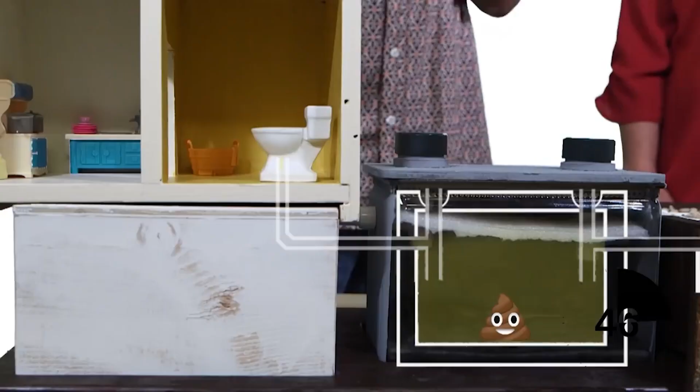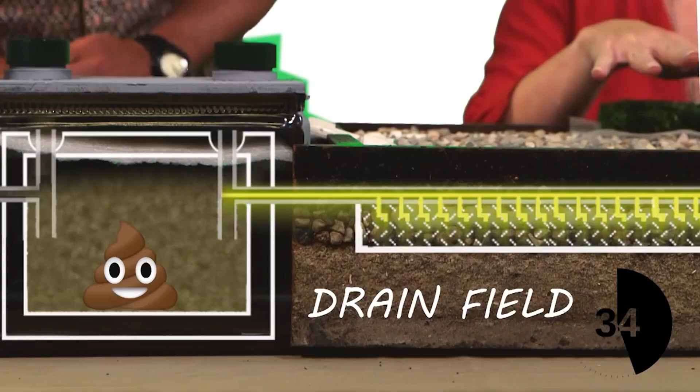After your poop takes a water slide ride into your septic tank, natural bacteria will help break down this stuff, but they can only eat so much. Everything the bacteria doesn't eat piles up in the tank over time. So remember to pump out your septic tank or the poop may try to bring the party back into your house. Ew! Meanwhile, liquid from the septic tank gets pushed out into something called a drain field. These pipes push wastewater through holes into a layer of gravel. This is where bacteria helps clean it before it filters through the soil and into our groundwater.

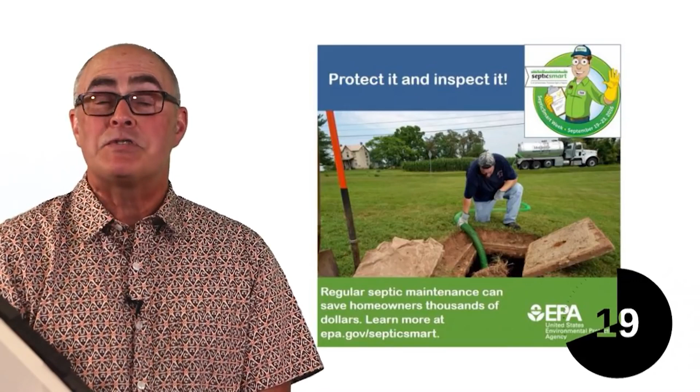But your septic system needs your help to do the best job possible. Start with these 3 SepticSmart tips. Number 1, protect it and inspect it. Have your septic tank pumped as necessary. Number 2, think at the sink. Don't use a garbage disposal. Number 3, don't overload your commode. Stop flushing things like wipes.

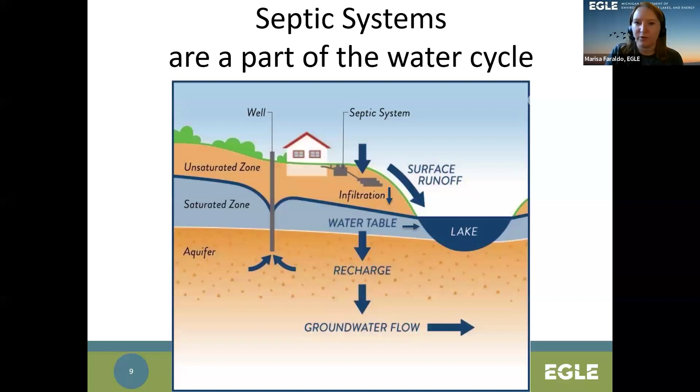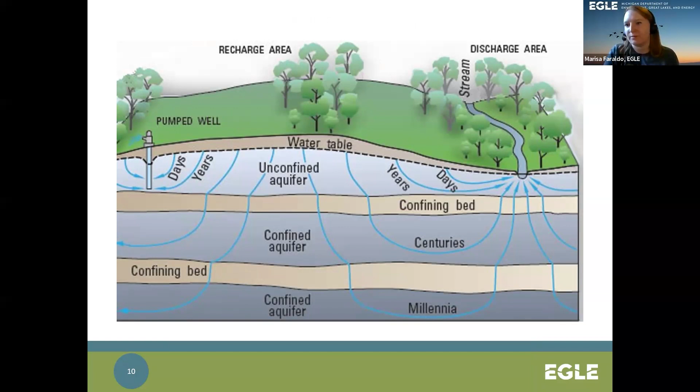This visual just shows the different timeframes for recharge into the aquifers, also known as the water table. Where there are confining layers such as clay, the deeper aquifers generally see longer periods of time before surface water reaches them. Groundwater is an important resource in Michigan.

There are estimated 1.2 million wells in Michigan. About 45% of Michiganders rely on wells for their drinking water, many of those being small and mid-sized communities utilizing wells, such as Lansing and Kalamazoo.

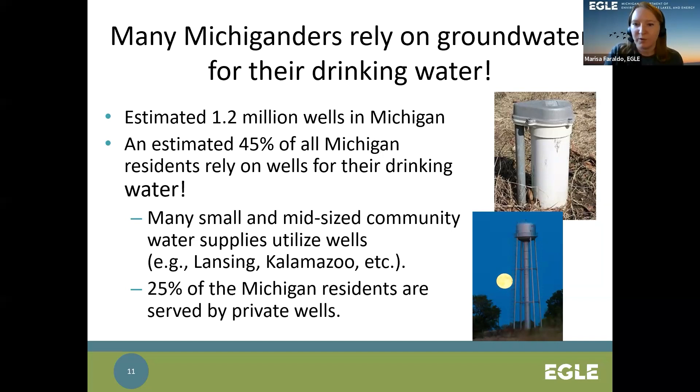25% of Michigan residents are served by private wells. Our surface water is also important. Michigan is home to 4 of the 5 Great Lakes, 6.5 million acres of wetland that support some of our rarest plants and animals, 11,000 inland lakes, over 76,000 miles of rivers, and 1,200 public and private beaches. In Michigan, we have many natural resources to protect.

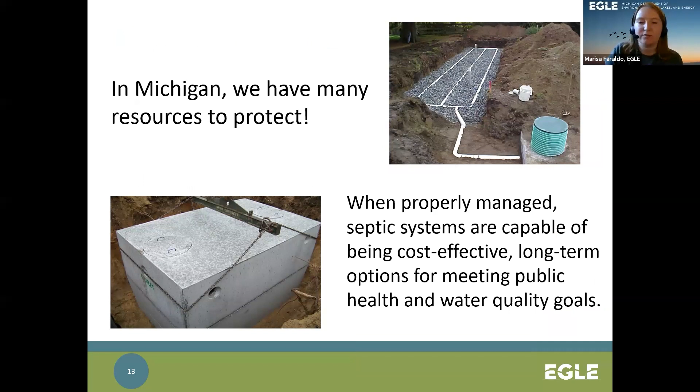When properly managed, septic systems are capable of being cost-effective, long-term options for meeting public health and water quality goals. So what is a septic system? A septic system is an underground wastewater treatment system. All wastewater treatment systems, whether it's a municipal system for a city or a single-family on-site system, include a collection system, treatment components, and dispersion into the environment.

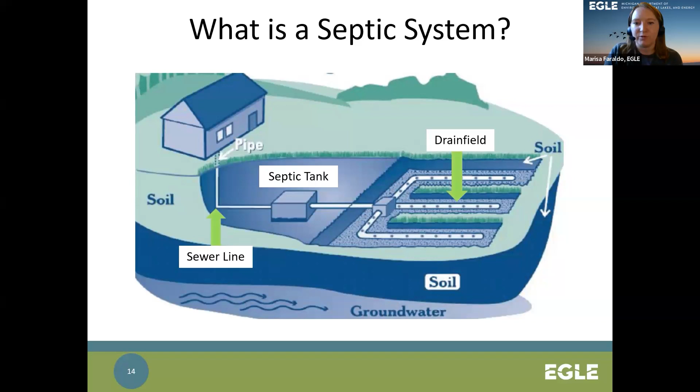In this image of a septic system, number 1 is the building sewer or collection system, leading to number 2, the septic tank, which is the first step in the treatment system, followed by the drain field, where the final treatment and dispersal into the environment happens.

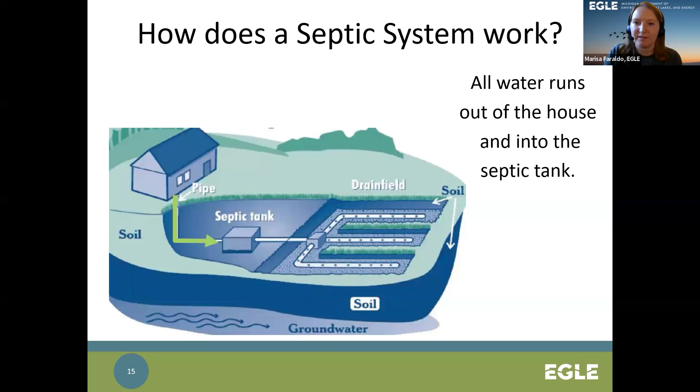How does the septic system work? First, almost all of the water runs out of the house into the septic tank. Almost all means that if you have a water supply treatment device, like a water softener, that discharge should not go into your septic tank.

What is a septic tank? A septic tank is a buried, watertight container, usually made of concrete, fiberglass, or polyethylene. A typical septic tank is 1,000 to 1,500 gallons for a single family of 4, and typically receives about 200 gallons a day. As the wastewater flows through, the solids settle and the grease and scum float, allowing relatively clear water to leave the septic tank.

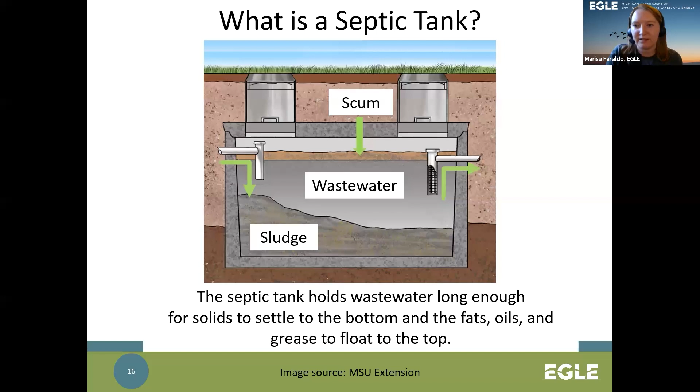Note that putting 200 gallons a day into a 1,000 gallon tank means that the water moves very slowly, taking up to 5 days to move through the tank.

A drain field is a shallow covered excavation made in unsaturated soil, also commonly called a soil absorption system. For conventional systems, research shows that once in the drain field, most of the treatment that takes place in the soil happens in the top 2 feet underneath the system.

While the treatment may be achieved in about 2 feet of soil in ideal conditions, if there is dispersal by gravity and therefore uneven spreading of the wastewater across the system, a deeper depth of unsaturated soil may be required for adequate treatment of the wastewater coming out of that septic tank. Requiring a minimum of 3 feet of separation provides a factor of safety, which may be needed at sites where drainage is limited. System designs can vary.

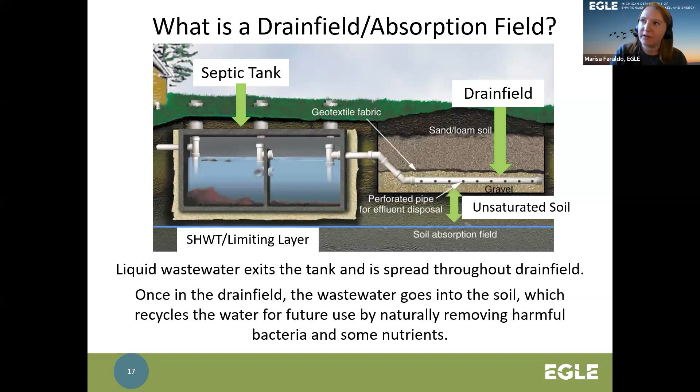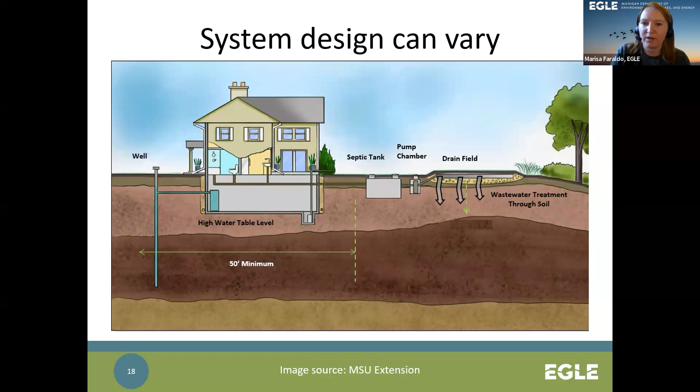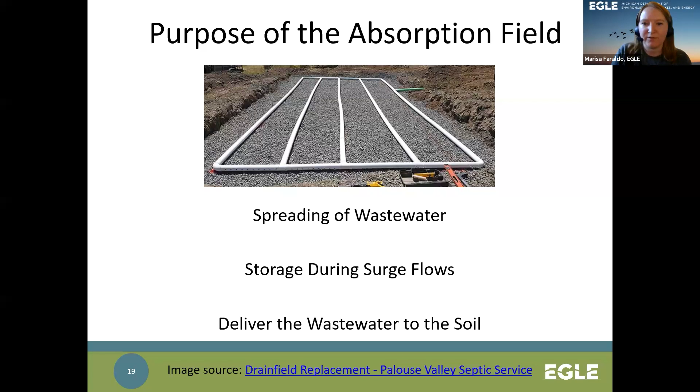We just showed what is also often called a conventional in-ground septic system, but in some locations with differing site conditions, it is common to need a raised system with a pump in order to overcome heavy soil and/or high water table conditions. The purpose of the absorption field is to provide spreading of the wastewater across the entire area, provide extra storage during surge or peak flow events, and to deliver wastewater to the soil, which is where most of the contaminants are removed prior to discharging to the groundwater.

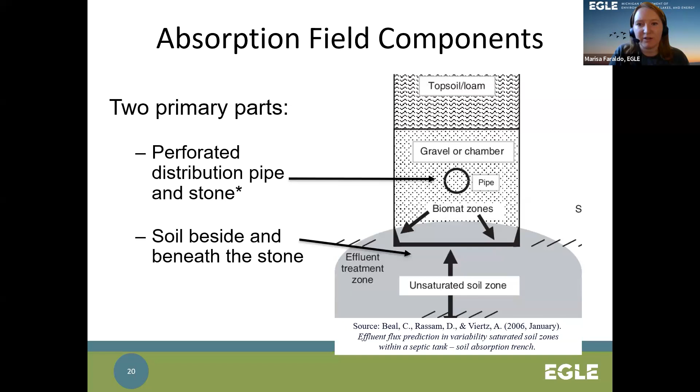In this diagram, we see a cross-section of a trench system, and as we mentioned, the absorption field is a network of perforated pipe and stone. Also, the placement above the highest seasonal groundwater is very important, as the naturally occurring bacteria that treat our wastewater do not live below the water table.

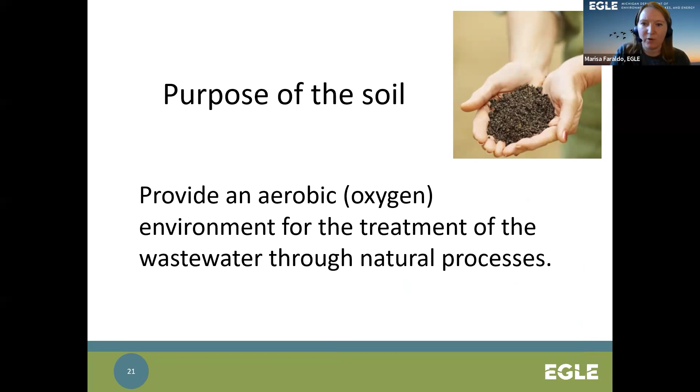Let's talk about the purpose of the soil beneath the absorption field. The soil provides treatment of the wastewater through biological, chemical, and physical processes, but only if the soil environment remains aerobic, meaning oxygen-rich and not saturated.

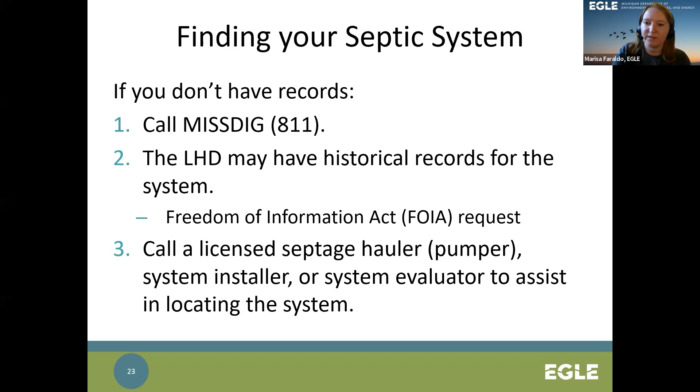Second, your local health department may have records for the system. There is the potential that if the home is older, there may not be records on file, or the records may be difficult to interpret. Another thing you could do is contact a licensed septage hauler, also known as a pumper, system installer, or system evaluator, to assist in locating your system. If you or other professionals cannot locate the system, it's better not to assume that the system even exists.

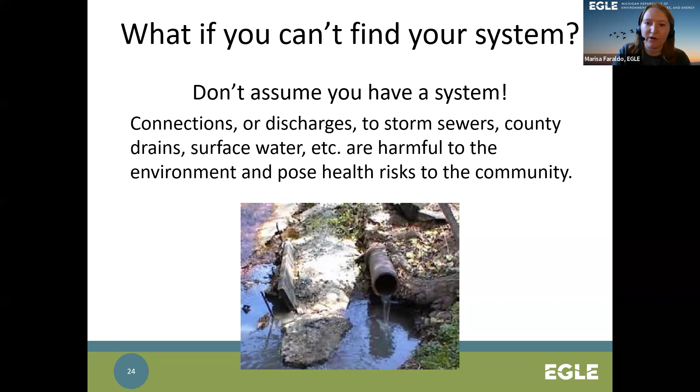It is possible that the home has a historical illicit connection. Connections or discharges to storm sewers, county drains, surface waters, etc., are harmful to the environment and pose health risks to the community.

Septic systems should not be out of sight, out of mind. Routine inspections and pumping as needed are important for maintaining the system and making sure that it's working. Catching a problem early on can save you costly repairs or replacement bills.

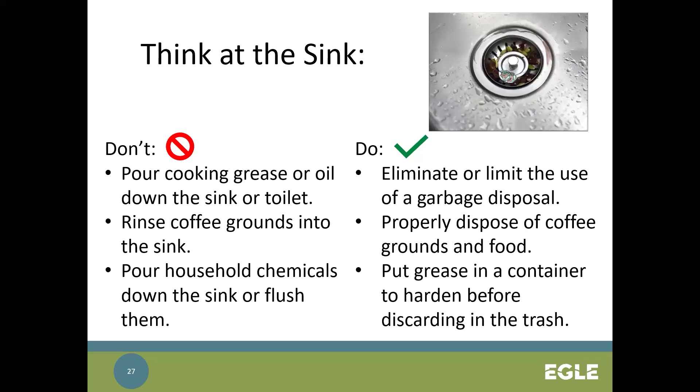You don't want to pour cooking grease or oil down your sinks or toilets, coffee grounds, food waste, using a garbage disposal, as we mentioned earlier in the presentation. These are all things that we want to avoid because they're adding extra solids into our system. They're adding, in some cases, medications or chemicals we also want to avoid. We don't want to add those things into our septic system. But what you do want to do is eliminate or limit the use of garbage disposals, properly dispose of your coffee grounds and foods in the trash, and consider putting your grease in a container to harden before you put it into the trash, rather than dumping it down that drain.

And then don't strain your drain. Again, being really mindful of our water use in our homes. Don't concentrate your water use by using your dishwasher, your shower, your washing machine, and your toilet all at once. All that extra water can really put a strain on your septic system. So what you want to make sure that you're doing is staggering your use of water generating appliances. This can be really helpful, especially if your system has not been pumped in a long time or during those really wet times of the year.

When we're having a lot of snow melt, we're getting a lot of rain, generally in the springtime here in Michigan, you want to be really mindful of how much water are we using at once, and you want to spread those things out. Rather than do 5 loads of laundry in a day, you want to kind of spread that out throughout the week. And then you can also consider becoming more water efficient by not only fixing plumbing leaks within your home, but installing water efficient products and appliances. Just a fun little tidbit, a leaking toilet valve, which doesn't sound like a big deal.

We've probably all encountered one at one point or another - a leaking toilet discharges about 2 gallons per minute and can result in just under 3,000 gallons of water in one day going into our septic system. Keep in mind, these systems are generally designed for a peak flow of 350 to 450 gallons a day. So getting an extra 3,000 gallons a day from just one leaking toilet is a huge deal and can have really harmful impacts on your system. So those kind of things that seem small actually have a big impact and should be addressed.

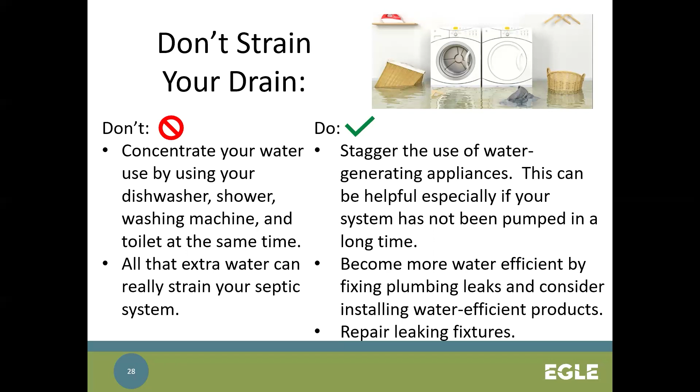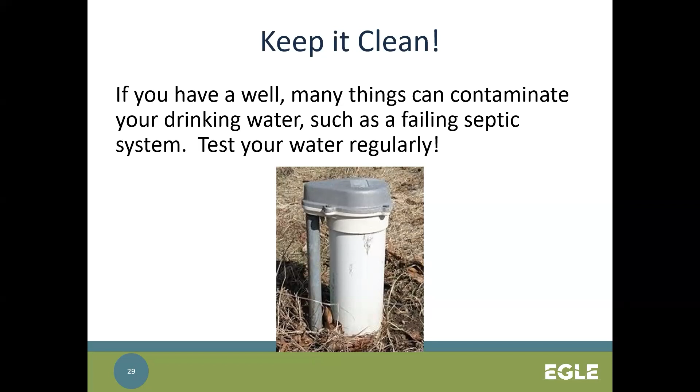Keep it clean. If you have a well, it's susceptible to environmental contamination from all sorts of sources, and a failing septic system is definitely one of those potential sources of contamination. It's really important to test your water regularly. If you live in an area where you're not sure what to test for, I recommend calling your local health department, asking them how you can get bottles and what specifically you should be looking to test for. That should be done on an annual basis.

Shield your field. I can't even count how many times I've gone out to a home and there are cars parked on the drain field, or someone wants to put a new above ground pool on their drain field, or a patio or a deck. All of these things are heavy and they can damage not only the pipes, but they can compact the soil in and around the drain field.

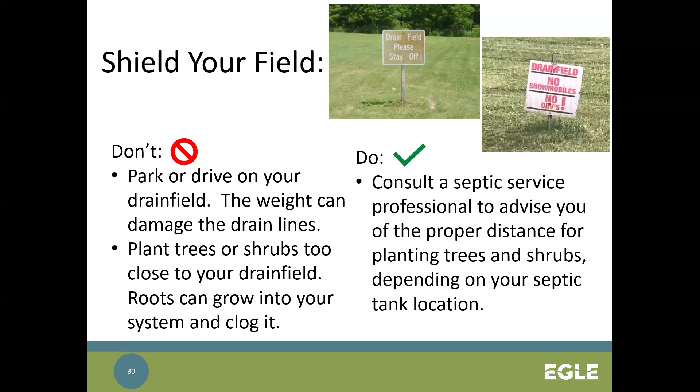So it's really important to keep that area free of any heavy equipment or heavy traffic. We also want to be careful of what sort of landscaping we're doing around our drain field. Planting trees or shrubs too close can lead to root intrusion and can cause serious damage in the long term. So before you're doing anything - having an addition put on, thinking about that pool, or maybe having a big party where you know you're going to need some extra parking space in your yard - it's really important to consult a septic service professional to advise you not only of the proper distance for your landscaping needs, but also on the location of your system. Knowing right where that is can help you to make sure that you're protecting it.

Don't overload the commode. So again, what are we putting down our drains? What are we flushing down the toilet? It's really important to not flush non-degradable products or chemicals such as hygiene products, condoms, dental floss, diapers, contacts, cigarette butts, cat litter, paper towels, pharmaceuticals, or - dun dun dun - flushable wipes. Flushable wipes, I know that they say they're flushable, but they do not readily or sufficiently break down in a septic tank, and we're seeing widespread problems all over the state, not only with septic systems, but with municipal systems as well related to flushable wipe use. So those things should all be going in the trash rather than down your toilet.

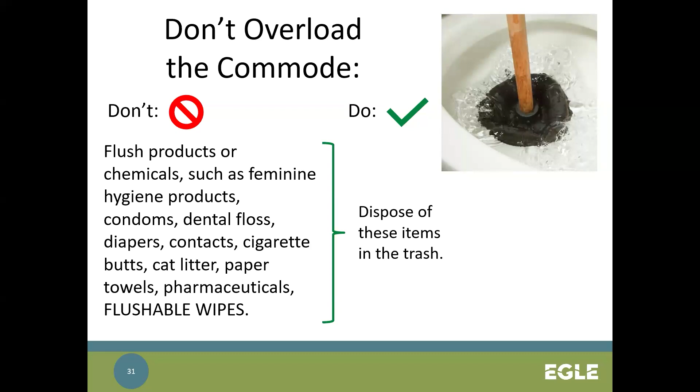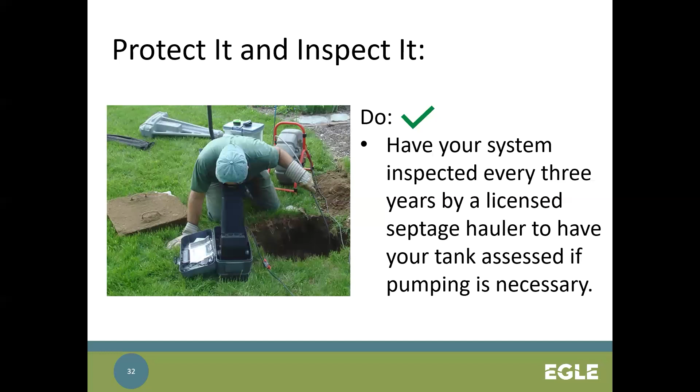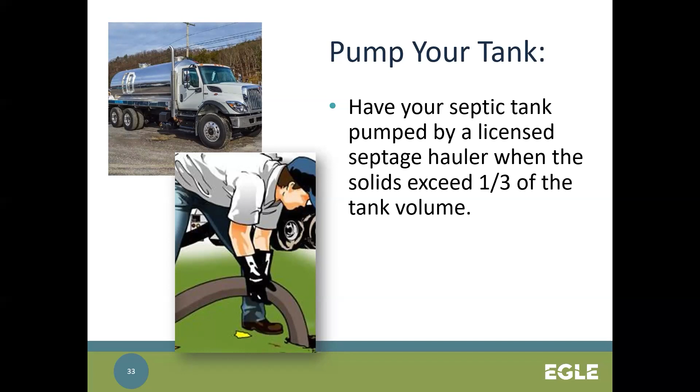Protect it and inspect it. It's really important to have your septic system inspected every 3 years by a licensed septage hauler and have your tank assessed to determine if pumping is necessary. If the volume of solids in your tank is greater than 1/3 of the total volume of the tank, then that's when we need to have things pumped. So if you are having your system inspected on that frequency and it's determined that you need to have your tank pumped, it's really important that you do that again when the solids exceed 1/3 of the tank volume.

So septic tank pumping, why is it important? Well, for operational efficiency, the typical retention time in your septic tank may be 3 to 5 days. However, when that tank isn't pumped regularly and the tank is, let's say, half full of solids, that reduces the retention time, causing water to move faster and carrying more solids out into your drain field, which reduces the efficiency of the system.

I think this is a good way to put this into perspective. Pumping your septic tank generally costs between $300 and $500. However, if you allow the solids to build up in your tank and then pass on to the drain field, the cost to replace a drain field could range anywhere from $5,000 to $25,000 or more, depending on what's required and how intense the damage is. So pumping your septic tank really is comparable to getting an oil change with your car.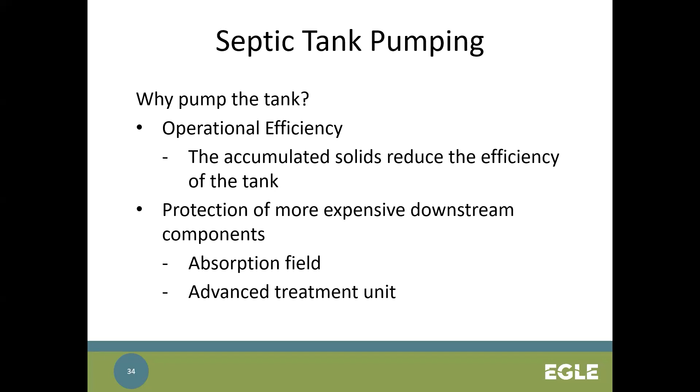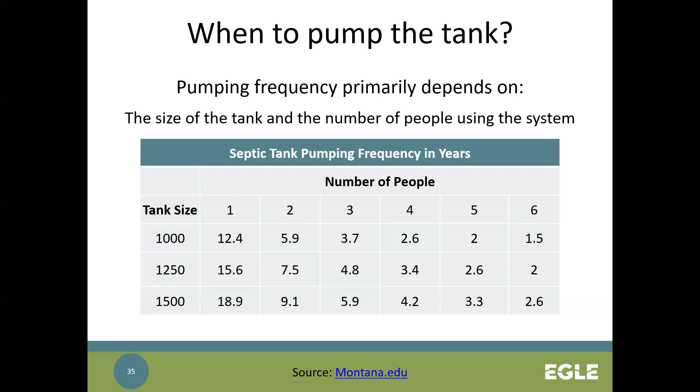A common approach is to pump every 2 to 5 years, and you can see that a majority of this chart falls within that time frame.

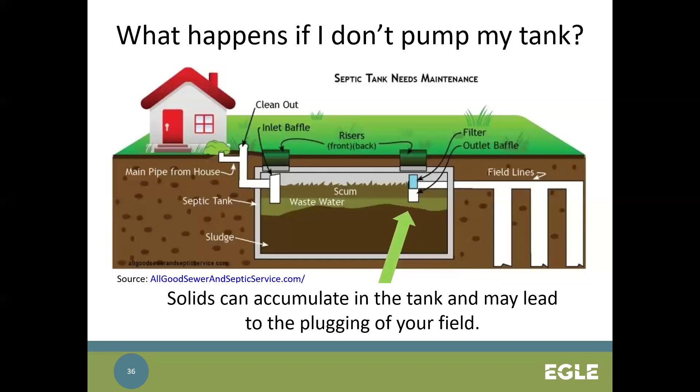What happens if you don't pump your tank? Solids accumulate to the point of moving out into the drain field, which shortens the system life and can potentially lead to a failing drain field. That means you can potentially have sewage backing up not only onto the ground surface in your yard, but also into your home.

Some early signs of problems are gurgling or slow drains, saturation around the septic tank or drain field, and backups into the lowest drains of your home. If you're seeing really squishy, lush, wet spots in your yard or on your drain field during dry times of the year, that can be an indication of a problem.

If not addressed, septic system failures can cause illness and or contaminate the surface or groundwater. As we just said, they can contaminate residential wells. We will link the EPA page about how to address system malfunctions and failures later in the presentation for you to look into.

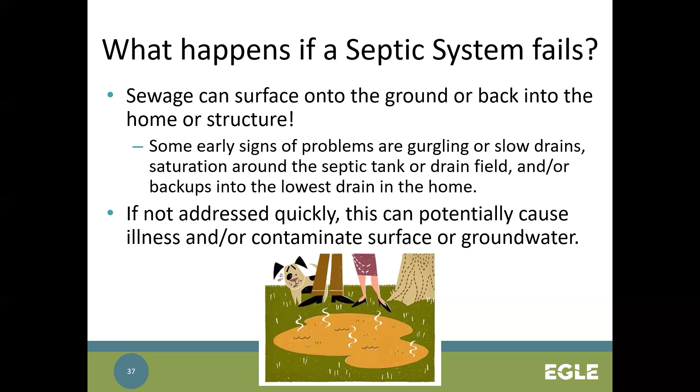Now I'm going to switch gears and give a little bit of information about this septic replacement loan program that you've heard me mention a few times already this morning. Go ahead and next slide.

This program started with the Michigan legislature appropriating $35 million to the EGLE On-Site Wastewater Management Unit to develop and implement a loan program to replace failing and near failing septic systems statewide. EGLE contracted with nonprofit Green Bank Michigan Saves to help develop the septic replacement loan program, SRLP as I commonly refer to it.

It is a two-tiered financing program. There's an income-based loan, called Tier 1, and a market-based loan, called Tier 2. Next slide. So some general provisions of this program.

These are unsecured personal loans for individuals owning residential dwellings. These loans are for sites with a documented failing, near failing, non-existent septic system, or similarly inadequate system. That failure or inadequacy is to be determined and or confirmed by local health department staff only. Replacement systems funded through the SRLP must be evaluated, permitted, and installed with EGLE's program minimum standards.

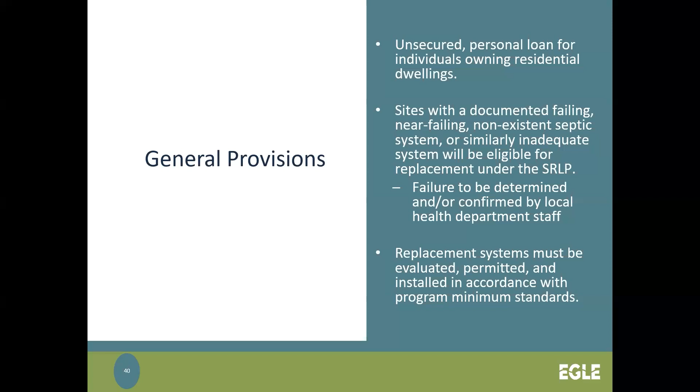Next slide. So authorized contractors - any contractor wishing to participate in the SRLP must register as an authorized contractor through Michigan Saves, which requires some proof of liability insurance, being in good standing with your local health department, being in good standing with LARA, and going through some required training.

Michigan Saves is currently recruiting and registering authorized contractors all over the state, and you can see we have 72 contractors fully authorized statewide, with over 50 contractor applications still being reviewed, processed, and finalized.

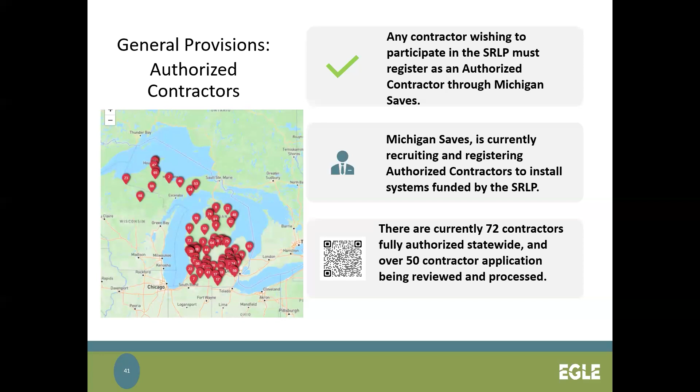This QR code will take you to a really great tool on Michigan Save's website where you can see all of the contractors statewide on this map, and it's interactive. You can click on any of these buttons and get all the contact information for that specific contractor. As you can see in this image, we have really great statewide coverage. There's a lot of options for homeowners looking to participate.

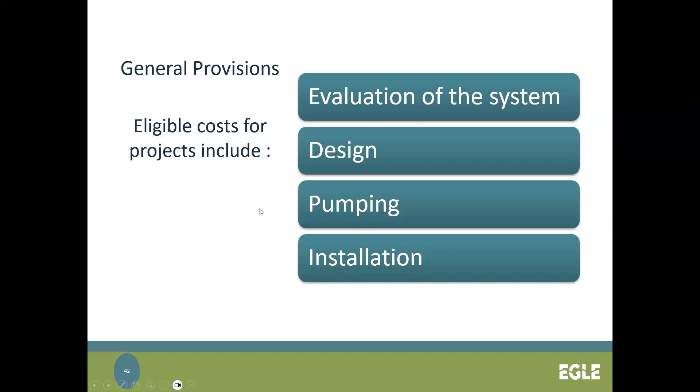Next slide. Some eligible costs for projects within the loan program include evaluation of the system, design, pumping, and installation. Some projects not eligible for funding through the loan program include lagoons, dry wells, cisterns, and any new construction projects. This is again for replacement projects only.

Restoration services, such as aeration options that we sometimes see, are not eligible for funding. And replacement of existing municipal sewer connections - so if you're somebody on city sewer and you need to replace that line, that's not eligible for funding through this program.

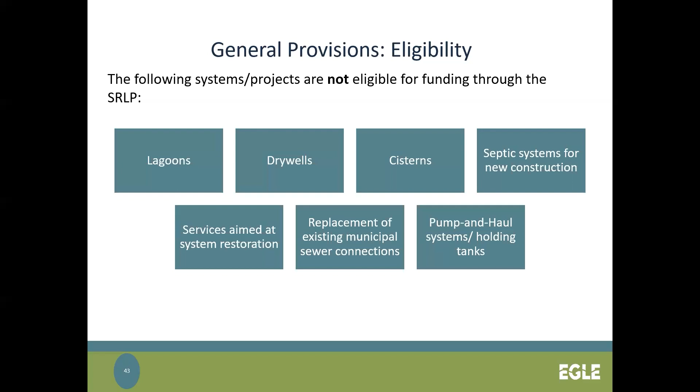And then any pump and haul systems or holding tanks. So the next couple slides, I'm going to give a little bit more specific information on each of these loans and some of the underwriting criteria.

So for Tier 1, again, that's the income qualified loan. You have to meet the income criteria, which is listed on the Michigan Saves website. I think I saw that link go into the chat, but if not, it's at the end of this presentation and will be provided in the follow-up email. So you need to meet the income criteria, and proof of income will be required or requested.

And then the loan structure: these are unsecured personal loans, so there's no lien or collateral required. Loan amounts can vary from $1,000 to $30,000. The Tier 1 folks have an interest rate that is locked in at 1%, with loan terms up to 10 years. And then our Tier 2 is a market-based loan.

This is for those homeowners who don't meet the income requirements of Tier 1, and traditional underwriting criteria apply. But again, unsecured loans, no lien or collateral required. For this one, loan amounts vary from $1,000 to $50,000, and fixed interest rates vary by lender. Right now, I think the lowest is a 7.5% interest rate, and again, loan terms up to 10 years.

So the process for all customers before applying for any loan through the SRLP: the customer must first obtain their local health department construction permit, and that needs to be in accordance with the septic replacement loan program minimum standards and guidelines.

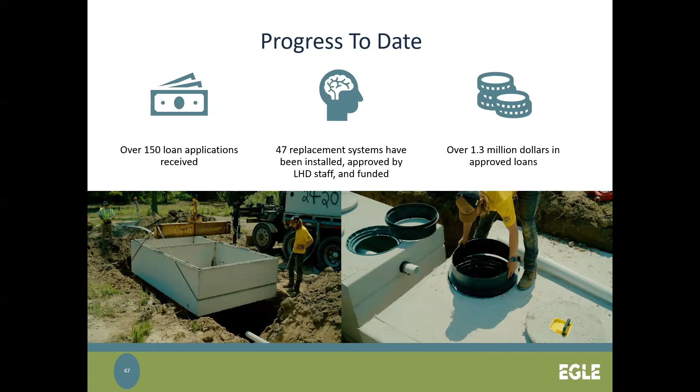So it's pretty quick. As for progress to date, we launched at the end of May. Both Tier 1 and Tier 2 loans became available to Michigan homeowners, and so far we have over 150 loan applications. We've installed 47 replacement systems that have been approved by local health department staff, fully funded, and over $1.3 million in approved loans.

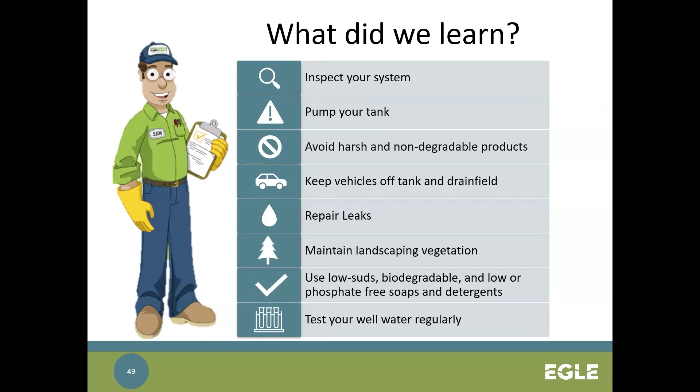So with that, what did we learn today? Well, we learned the importance of maintaining our septic system—inspecting your system, having that tank pumped regularly, being really mindful and aware of what we're putting in and around our systems, repairing our leaky fixtures and watching our landscaping and vegetation, and using low suds, biodegradable, and low phosphate free soaps and detergents.

And then we also talked about the importance of testing your well regularly. So with this, we're just going to go through a few online resources that are available to everybody, which are really helpful as far as septic system information and maintenance information, and what to do if you are having issues.

And then the EPA has their SepticSmart webpage that has even more materials and resources. So again, lots of great infographics and information housed there, both in Spanish and English. And they have more languages that they're working on adding. So really, really great stuff.

And then some other resources about septic systems that are sort of outside of that SepticSmart campaign. The EPA has a page with a lot of good information about different types of systems and training materials such as webinars. As I mentioned, the EGLE On-Site Wastewater Management Program has its own page that has a lot of really great information and access to state rules and also access to our webinars.

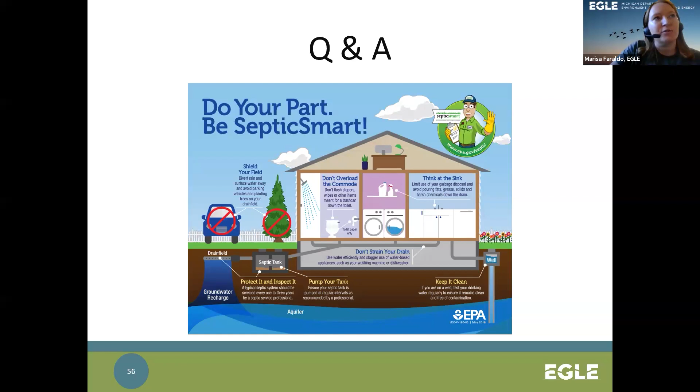So one of the first questions is, the video says not to use a garbage disposal, why? So Anne got into this a little bit, but garbage disposals grind up the food, I mean, that's what they're supposed to do. And when you're doing that, it makes them really fine and small, and they have a really hard time settling out. So what happens is you have all these little bits of food floating in your septic tank that won't settle out into the sludge layer, and then they really readily just go straight out into your drain field.

So garbage disposals and coffee grounds have the same problem. You don't even have to grind them up, they're already there. So if you wash those down, they don't settle out, and then they can end up in your drain field and clog soil pores, which are very small and easy to clog.

Okay, next question is, where should water softener regeneration water go if not into the septic tank? Generally, homeowners will have its own little system, so like you could do some kind of drain, French drain, dry well.